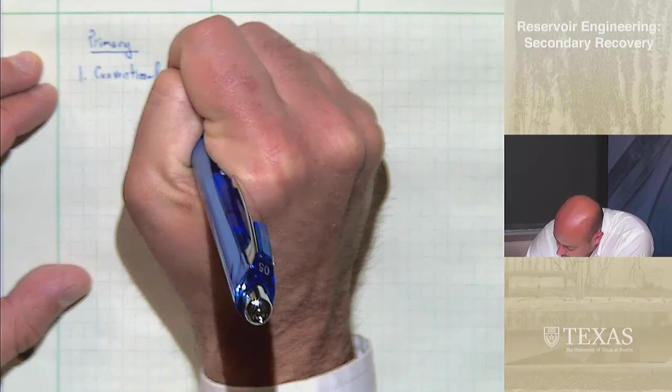If you have a conventional well, a conventional reservoir, that's a sandstone or carbonate, usually on the order of 1 to 1,000 millidarcies. The oil recovery is going to be 10 to 20% from primary recovery. You use techniques like artificial lift and whatnot to improve that.

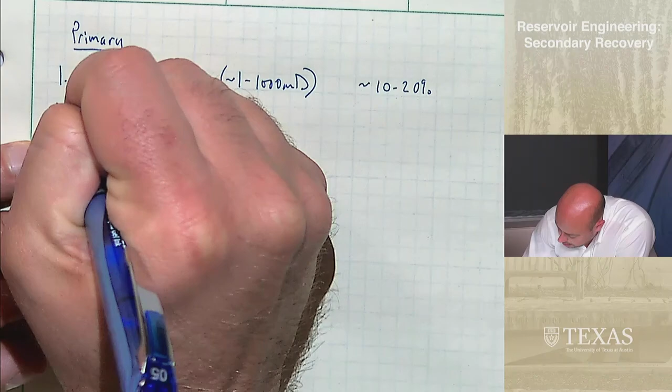In unconventional reservoirs and shales, we're often talking on the order of less than 1,000 nanodarcies. So maybe 1,000,000 times less than that. That is a really small permeability.

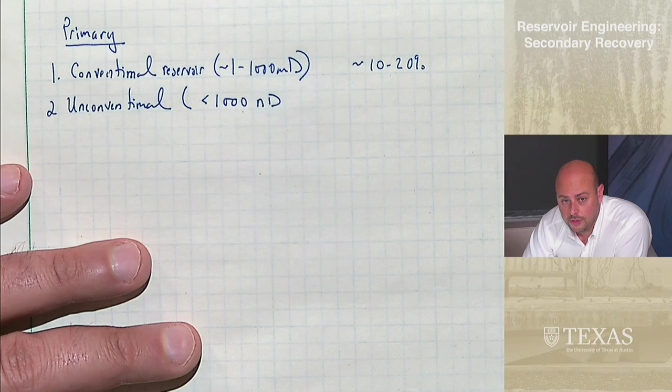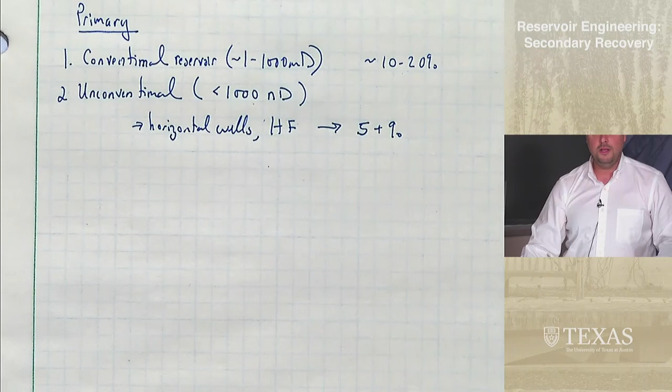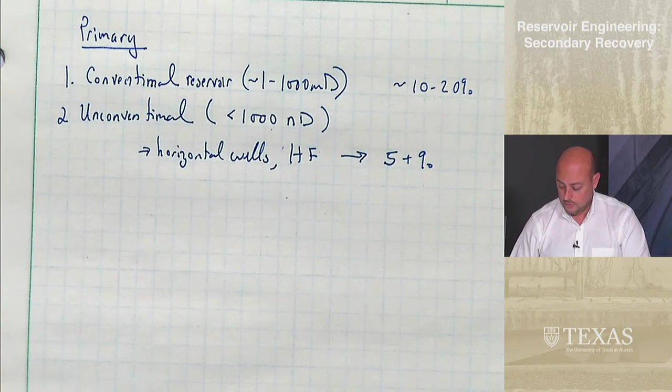For decades we knew about them, but we didn't even bother because it was impossible to create. And of course we've developed horizontal wells, hydraulic fracturing, and that has led to 5+% primary recovery. And yes, you're reading that right. This is that in a typical unconventional reservoir like the Bakken or the Permian Basin or something, we might produce on the order of 5% from primary recovery, and then we're often done. We don't even bother with secondary or tertiary recovery. So you can imagine that there's an enormous amount of potential there in unconventionals. And despite this low recovery, they're still very economical, and that's a big portion of our production.

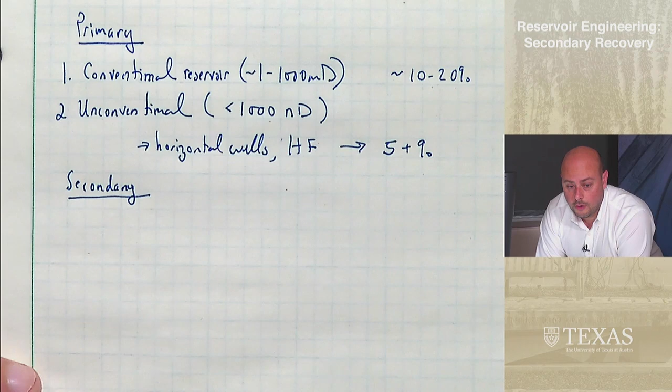Secondary recovery, and different people have defined this. The way that Dr. Lake defines it is the injection of any fluid after primary recovery that already exists in the reservoir. So the most common being water flood. You can inject natural gas too. That's another common one, but water flooding is the most common.

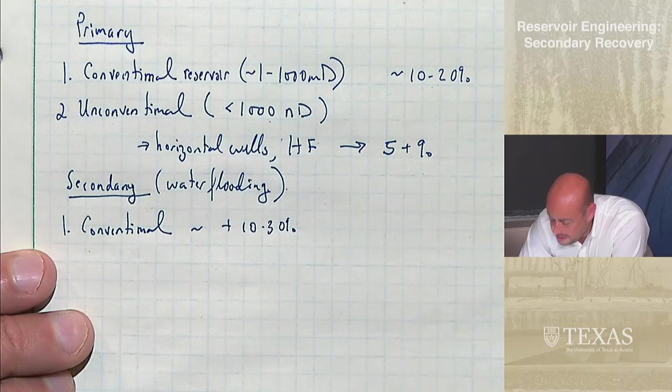In conventional reservoirs, we might get an additional 10 to 30%, and this might take decades. Primary recovery might occur over several months or just a couple of years. You might water flood for decades. We're still water flooding reservoirs that we found decades ago.

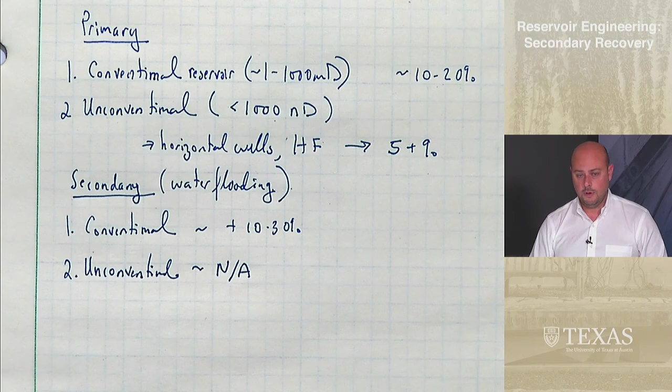Unconventional, I'm going to put NA. That's one of the reasons why we didn't talk very much about unconventionals in this class, because water flooding shale reservoirs is not all that practical. The pores are so small in shale reservoirs that it's difficult to inject that water. The amount of pressure you would need to flow through there is extremely high. So we don't usually water flood, but we're starting to do that a little bit, and this might be an area of the future. Remember, primary recovery in unconventionals wasn't even a thing 20 or so years ago. Water flooding may be standard, or other secondary techniques might be standard in a few decades, and you might be the person that helps to develop that technology.

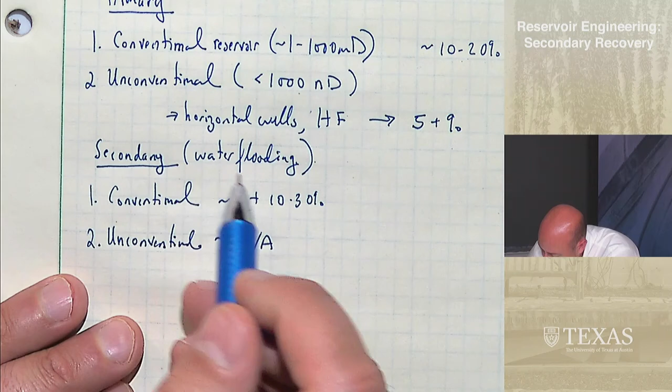And I say that it's NA, referring specifically to water flooding, because there are other techniques like injecting natural gas and other techniques that are usually tertiary or enhanced oil recovery techniques.

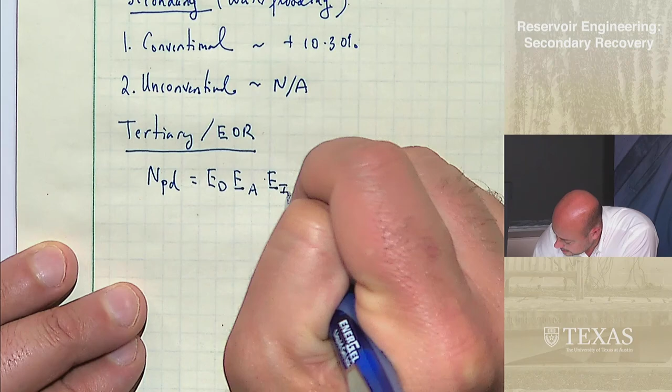Okay, let me talk a little bit about that. Remember that the dimensionless oil recovery is the displacement efficiency times the areal sweep efficiency times the vertical sweep efficiency times the initial oil saturation minus SOR. So those three different sweep efficiencies, I'll just call them E, are functions of time and the mobility ratio.

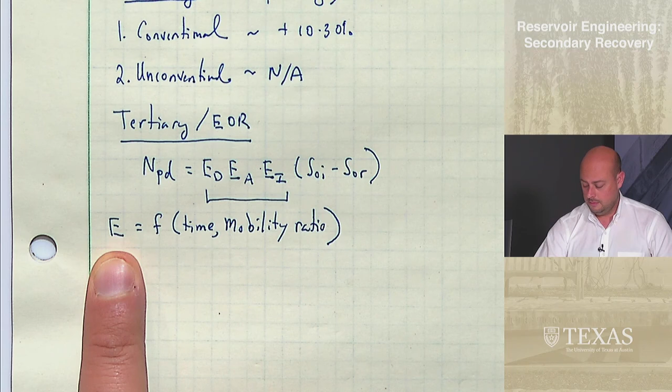Time, or dimensionless time, pore volumes injected. And remember what I've always said is that if we were willing to wait long enough, then E would go to 1, regardless of the mobility ratio. But we're not, because that might take hundreds of thousands or millions of years to do that. So it's very much a function of mobility ratio. I'll talk about that in just a moment.

Well, let me just define. Remember that M is the mobility ratio, and it is equal to KRW times mu O over KRO times mu W.

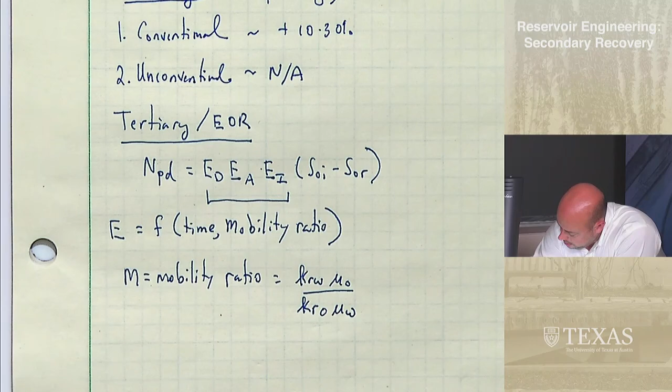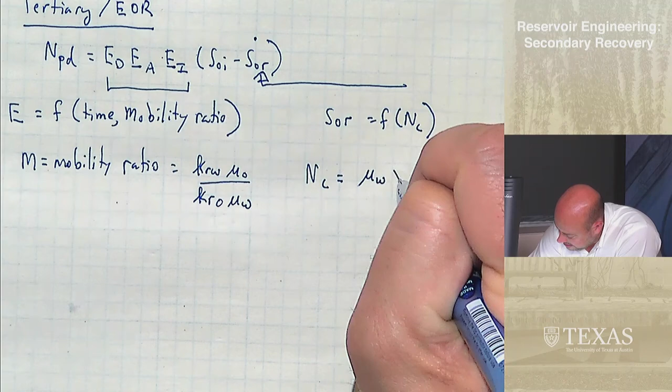The other thing we might want to try to improve is SOR, which is a function of the capillary number. What is the capillary number? A capillary number is a dimensionless number, which is the water or aqueous phase viscosity times the velocity divided by the surface tension, or the interfacial tension.

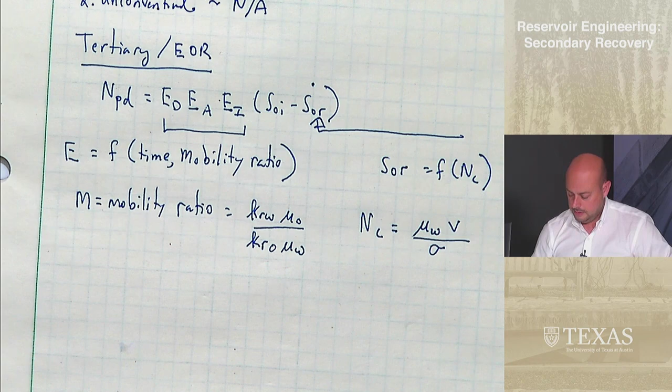So, in enhanced oil recovery, our goal is to improve the mobility ratio to make it smaller, right? So we want the mobility ratio to be smaller. That means either increasing the aqueous phase viscosity, decreasing the oleic phase viscosity, or decreasing the interfacial tension.

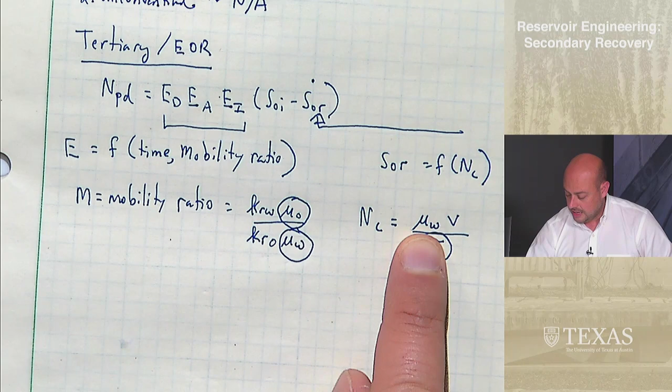Now, it's harder to change the relative permeabilities. You can see that we got the aqueous phase viscosity and velocity on the numerator. Those are both difficult to have a large effect on, and I'll explain why.

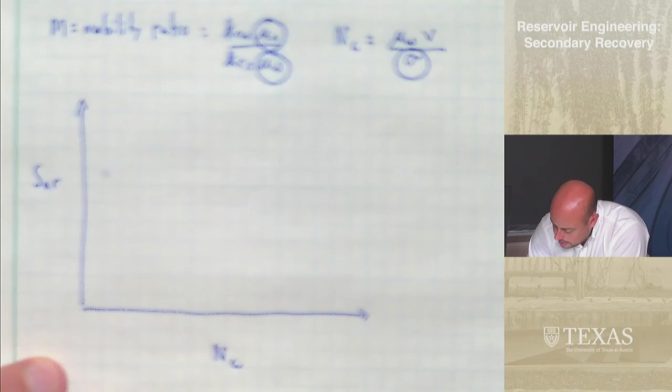So, if you were to plot SOR, the residual oil saturation, versus the capillary number—remember that's viscosity times velocity divided by interfacial tension—you get what's called a capillary desaturation curve. You can create this in the lab. It looks something like this.

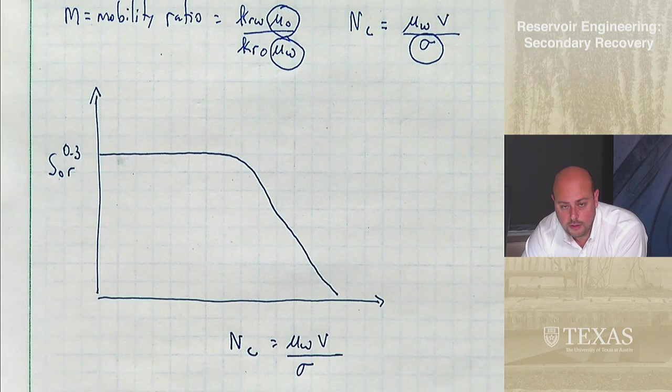This is a linear scale, so maybe this is like 0.3 or something. It all depends on the rock and the oil. This axis is linear, but this one is a logarithmic scale, so it might go 10 to the minus 9, 10 to the minus 8, 10 to the minus 7, 10 to the minus 6, 10 to the minus 5, 10 to the minus 4. A typical water flood might be somewhere over here.

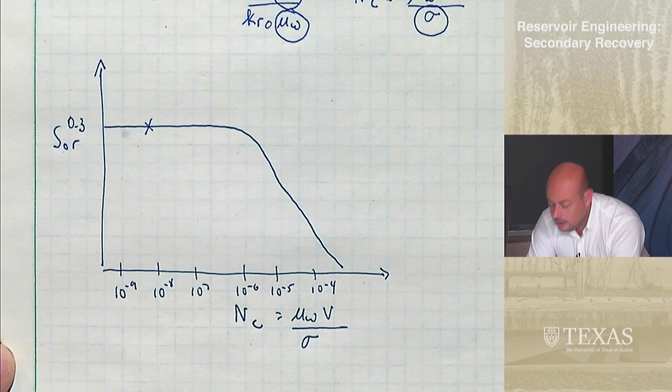So you can say, well, I can decrease SOR by increasing the capillary number, and I can increase the viscosity. I've been telling you all semester that we could do that using polymers or something. So we could increase the viscosity, or we could increase the velocity. That would increase the capillary number. Unfortunately, that doesn't work very well.

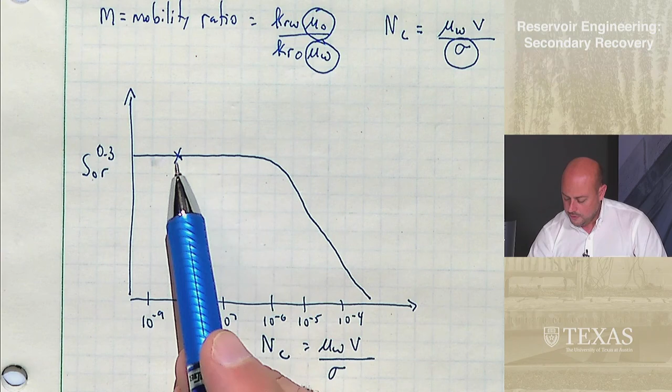The reason why is because we're here on this flat part of the curve, and this is a logarithmic scale. You would have to increase the viscosity or the velocity by several orders of magnitude to make a real difference, and that's just not practical. So what that means is we don't use polymers and other viscosifying agents to decrease SOR, but we can change the interfacial tension, and that's what surfactants are used for.

Okay, so in summary, EOR methods are lumped into decreasing the mobility ratio M. The way we do that is to increase the water viscosity. Those are polymer type methods, which are chemical EOR methods, or decrease the oil viscosity. Those are thermal or gas injection methods.

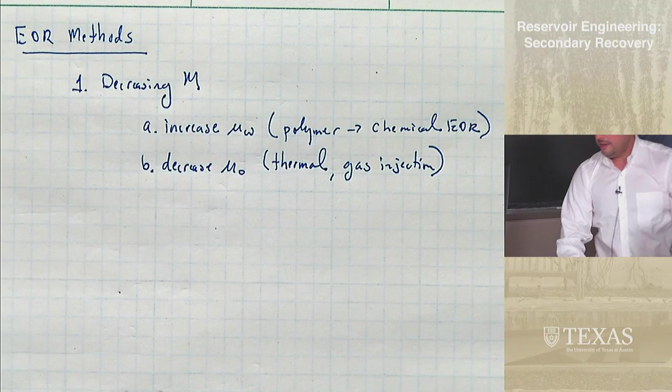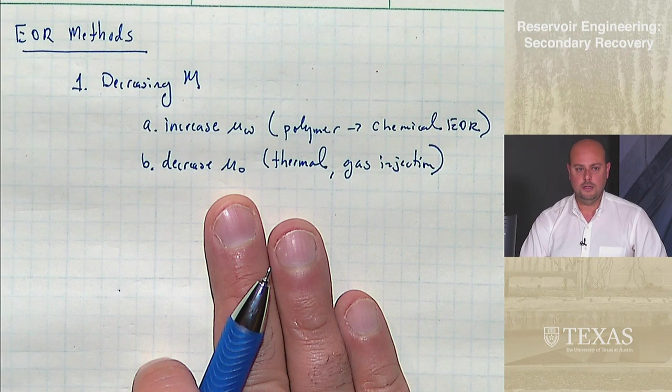So what do thermal methods do? It means heating it up, right? It works just like when you put your cooking oil on the stove in the morning. It's super thick and viscous. You put it on the stove, you heat it up, and then it flows really easily. It's exactly the same thing. We're going to heat this up, usually with steam. There are other ways to do it, like electromagnetic heaters and other things. But you heat up the oil, it decreases the oil viscosity, and then you have a lower mobility ratio.

Think about a reservoir, say in Canada, that's got really, really high viscosities. I'm not talking 10 times as much as water, I'm talking thousands or millions of times the viscosity of water. It's almost like a solid. Then heating has a big impact. With gas injection, you can inject things like carbon dioxide or methane, maybe nitrogen, in order to decrease the viscosity.

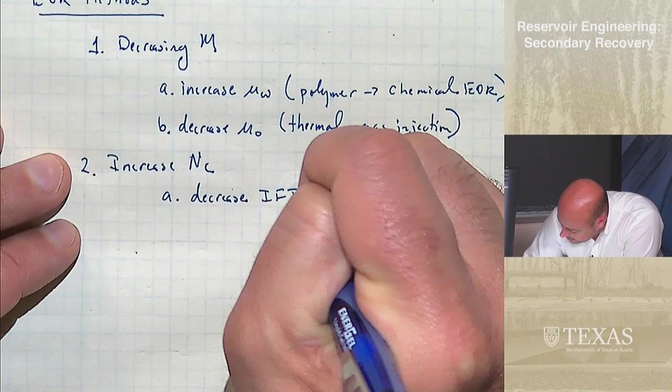And then the other method is, of course, to increase the capillary number, which is to decrease the interfacial tension sigma. You learned about that in petrophysics. Oil and water don't mix, they've got some sort of interfacial tension. What surfactants are is a different chemical EOR method.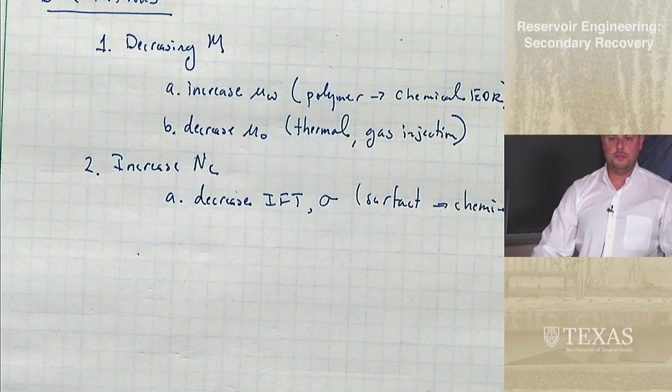They're basically soaps or detergents, and they work the same way. Just like you use detergent to clean your dishes or clothes, or soap to clean your hand, if you've got some sort of grease or oil or non-wetting fluid, and you try to use water to clean it up, it doesn't clean well. But if you add a soap or detergent, it reduces the interfacial tension and it comes off easily. It's the same idea in a reservoir. The oil and water don't mix, they're separated, and you get trapped oil. But if you reduce the interfacial tension with a surfactant, it flows much easier.

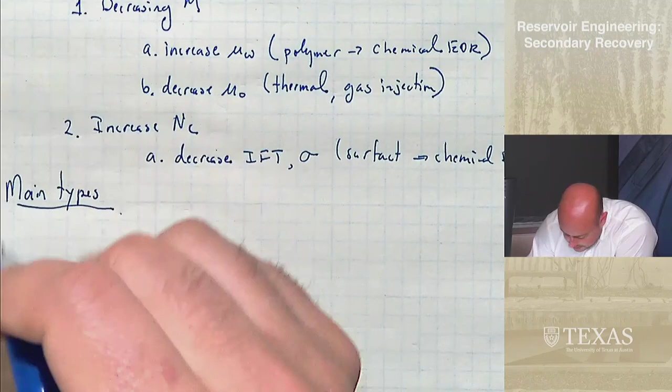So the main types of EOR methods are chemical. I like talking about this because this is my area of research. It's to use polymers and/or surfactants. Remember, they do two very different things: the polymers decrease the mobility ratio, the surfactants increase the capillary number, and that decreases the SOR. So they work in two different ways. Many times they're used in conjunction with each other. You'll inject a surfactant and then use a polymer drive for mobility control. We call that an SP flood, surfactant polymer flood.

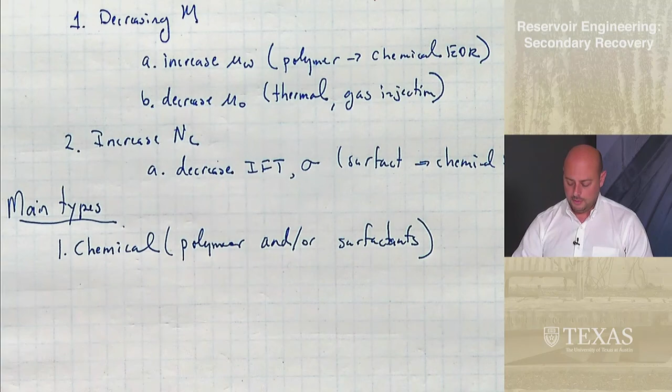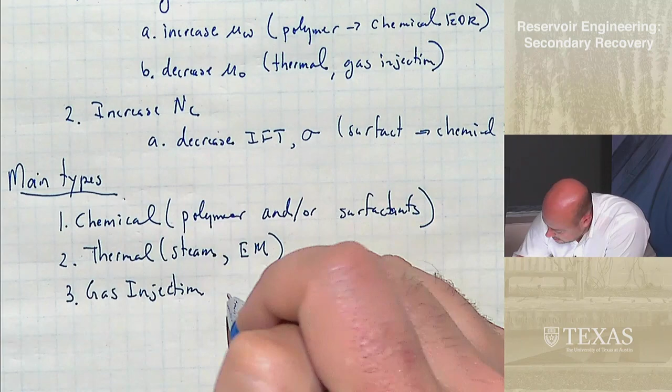The next method is thermal, as I mentioned, which is steam or electromagnetic heating. And the last one is gas injection, usually CO2, but it could be methane or nitrogen.

There are other, less used techniques. One of them is microbial EOR. What they do is inject microbes that feed off the nutrients in the reservoir, and at the oil-water interface they reduce the interfacial tension. So in a way, they work like surfactants.

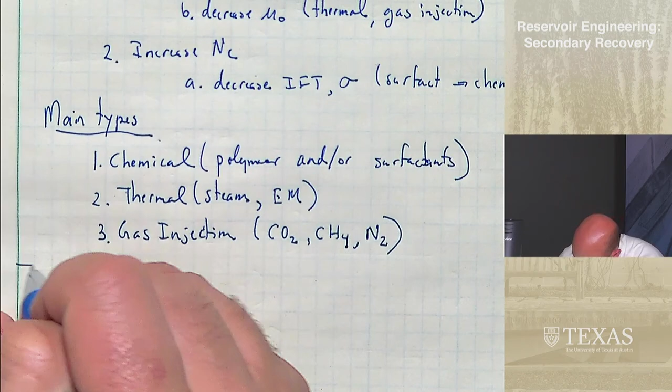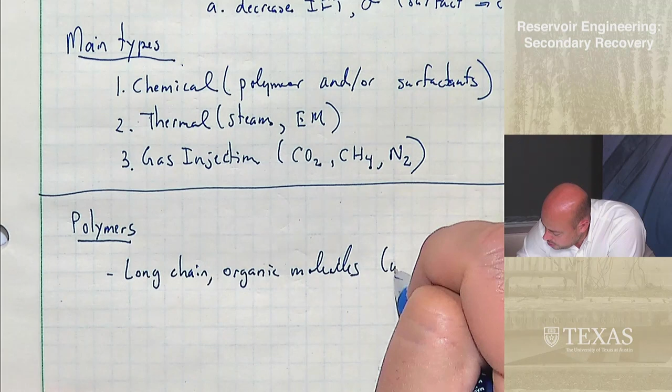Okay, so let me talk about polymers. I like talking about that because that's what I do a lot of my research in. What polymers are is they're long chain, usually organic molecules. They're usually, for our purposes anyway, dissolved in water. You all are familiar with polymers. You've heard of polyethylene, polypropylene. Most plastics are polymers, right? So you've heard of those. These are water dissolvable polymers that increase the viscosity.

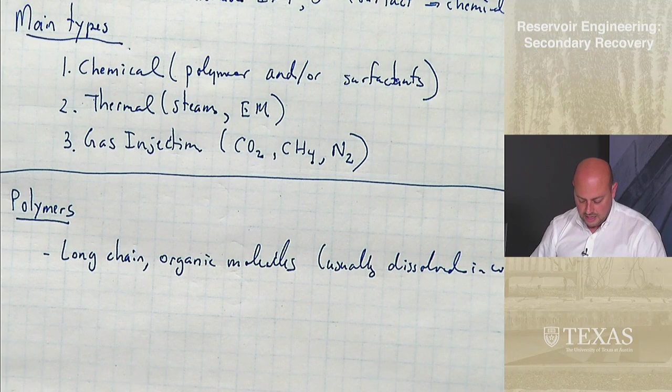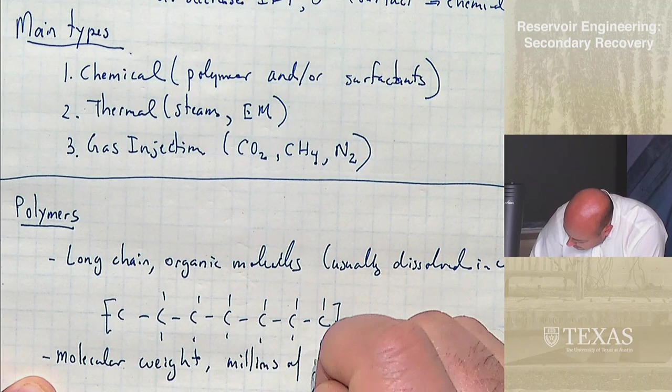And so remember I said that these are long chains, so what you might have is carbon molecules. These are connected to hydrogens, right? And I stopped at a point, but these are huge. These molecules are gigantic. They have a molecular weight of millions of grams per mole or pounds per pound mole, which means that there's thousands or more carbon atoms in there.

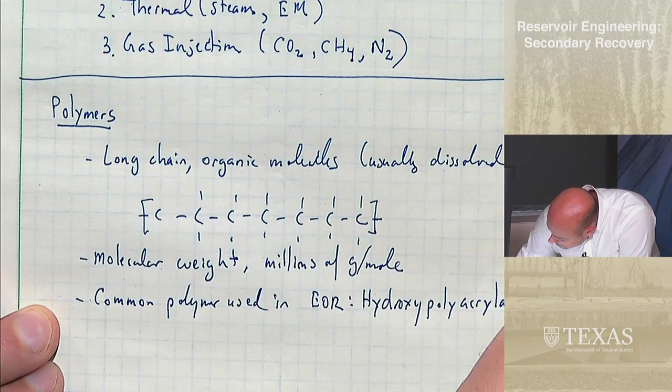One common polymer used in EOR is called hydrolyzed polyacrylamide. Okay, or we'll call it HPAM for short. Let me see if I can.

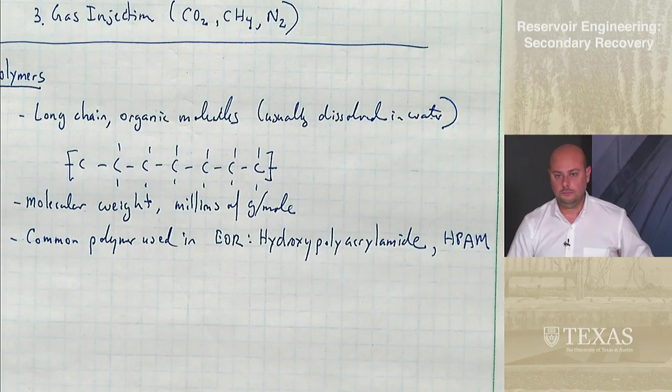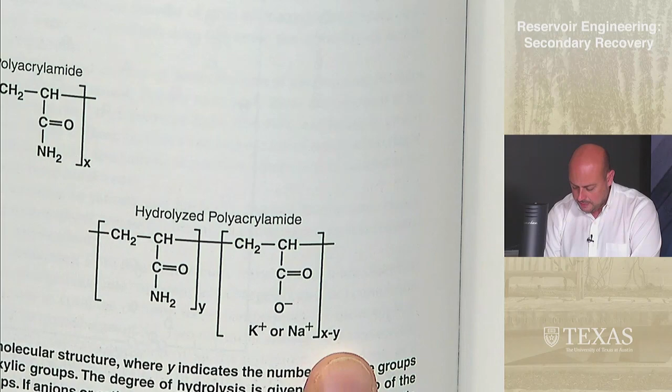So here's the structure of hydrolyzed polyacrylamide. So you could see what that looks like, and it's this molecule then connected to this molecule, and it's got, it was sort of like the polyethylene I showed, but then it's got this C double bond O and this NH2 group on there, and I've got this Y and X minus Y, so Y could be huge, right? It could be thousands, and X could be that. This is hydrolyzed polyacrylamide. That's what the chemical formula looks like.

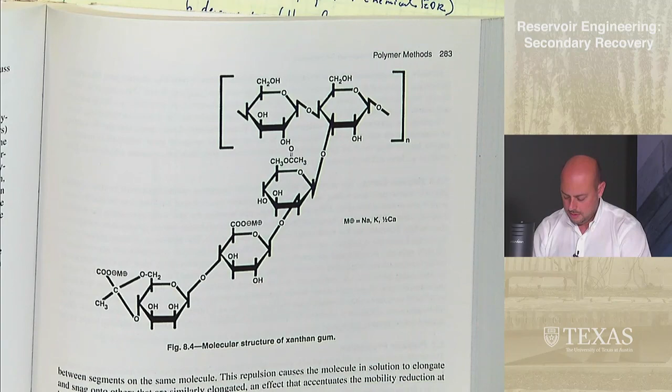Another less commonly used one, they used to use this one years ago, decades ago. They don't use it so much anymore. It's called xanthan gum. And I wanted to show that one because even though we don't use it as much in EOR, if you check the ingredients on most of your food, especially the processed food, there'll be xanthan gum in there. So you've got a chemical EOR agent in a lot of your food.

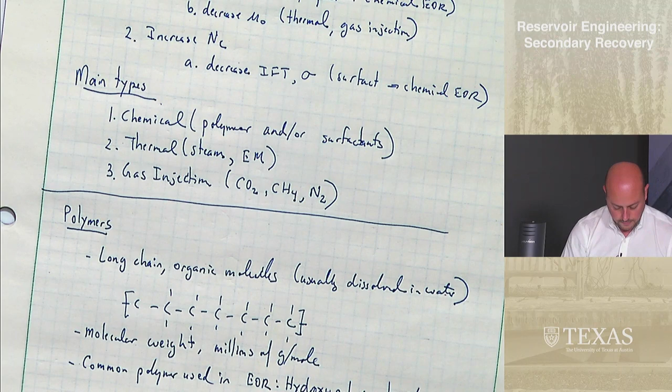These polymers have a high viscosity. Okay, and what I mean by that is it's going to be greater than 1 centipoise to maybe 1,000 or so centipoise. Okay. So water has a viscosity of 1 centipoise. At reservoir conditions where the temperature is high, maybe it's half of that, half a centipoise.

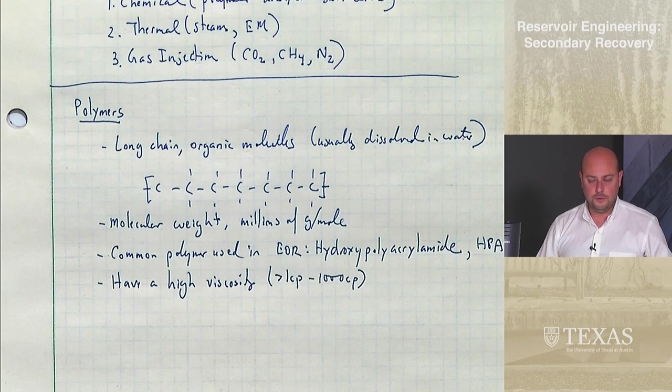Polymer, the only reason it's useful is because it's higher. It gives us a better mobility ratio. This viscosity of the polymer is a function of the molecular weight, the concentration, the salinity, that's the salt content, as well as things like temperature, etc. And the type.

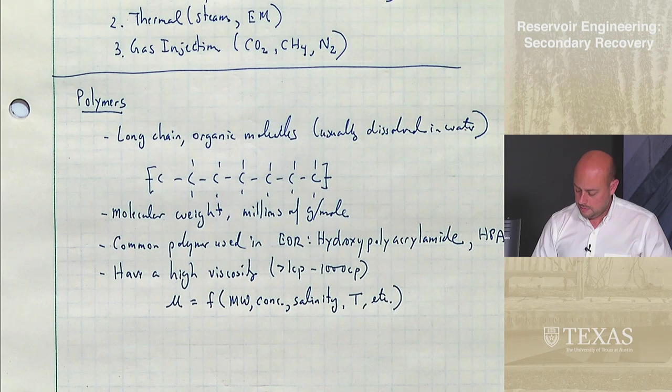So, by the way, I mentioned HPAM. There are some derivatives of HPAM that have been developed that are more suited for particular reservoirs. Okay, so you can increase the molecular weight. That's to make this molecule bigger. You can increase the concentration. We only add a very small weight percent in there, but if you add more, then it's going to make it even thicker. Probably not a surprise.

It's a function of salinity, and actually the lower the salt content, the higher the viscosity. It's a function of temperature. You can imagine it decreases with increasing temperature, just like most fluids.

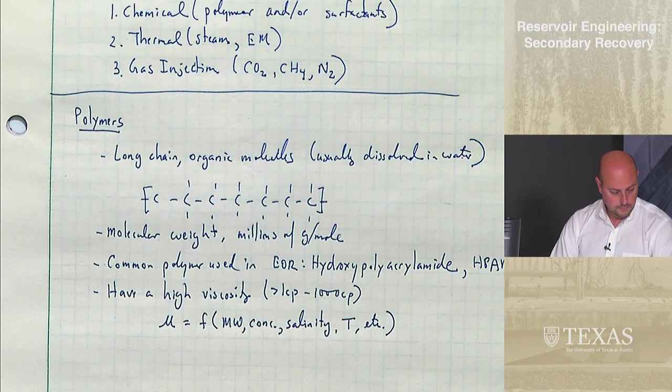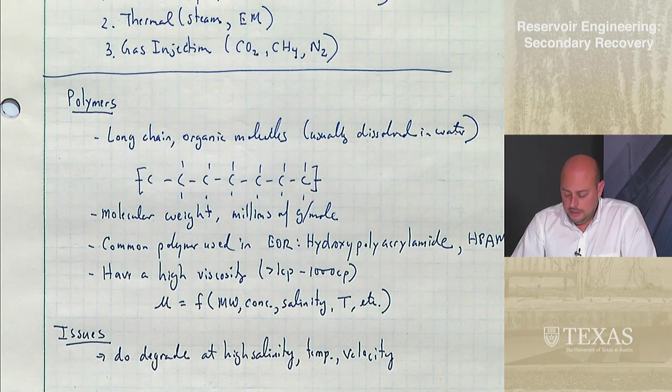Some of the issues are they do degrade at high salinity, temperature, or maybe velocity. Okay, by degrade I mean it breaks up the molecule and then it decreases the viscosity. Okay, so it sort of defeats its point, right? So it's very hard to get a good viscosity of these things, and the way you compensate for that is that you increase the concentration. If you increase the concentration, then that costs more money, and so the issue is cost, right?

Water's cheap. Okay, when you start adding any of these enhanced oil recovery methods are expensive, so that's why we often don't do them. It's just not economically beneficial. So we're always looking for ways to improve the cost.

The other is the injectivity. Okay. So the whole point is that these polymers have a high viscosity, which improves the mobility ratio. But it's harder to inject a high viscosity fluid than a low viscosity fluid. That just makes common sense, right? It's harder to inject. For the same pressure drop, you're going to get less flow rate, or for the same flow rate, you'll get a lot bigger pressure drop.

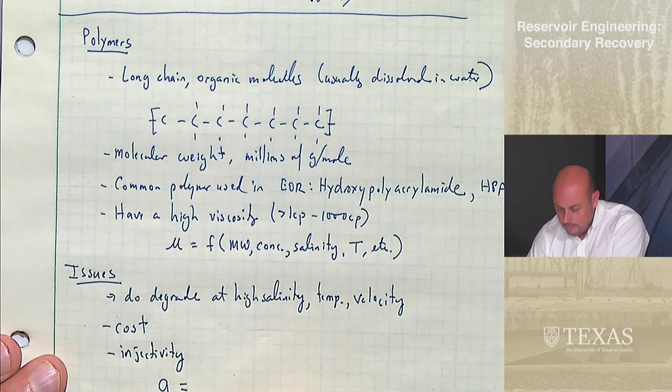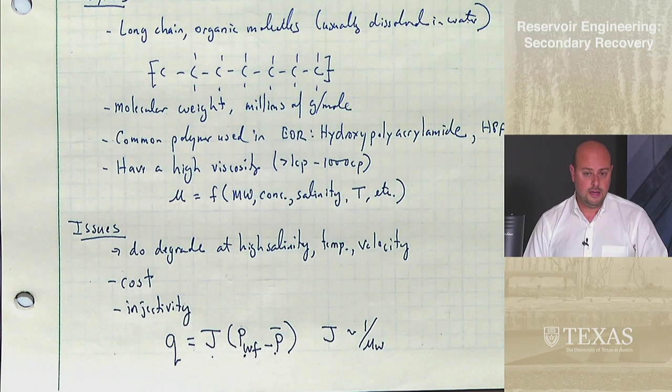And in fact, you remember from Reservoir 1 that we learned that the production or injection rate in this case is equal to the productivity index times the bottom hole pressure minus the reservoir pressure. So for given average pressure and bottom hole pressure, it's a function of J, and J is inversely proportional to the aqueous phase viscosity. So if you increase the viscosity by a factor of 10 or 100, then that means that your injection rate is going to decrease by 10 or 100 for the same bottom hole pressure.

Or alternatively, if you wanted to keep the rate up, then the bottom hole pressure would have to be higher. And if you injected too high of a bottom hole pressure, then you might fracture the rock, and you don't want that. Okay, so that's a problem. The nice property of polymers is that it partially, not entirely, but it partially offsets that.

So if you were to plot the viscosity versus the shear rate, shear rate is proportional to velocity divided by the square root of permeability. It's more complicated than that, but that's good enough for us. You might remember from your transport phenomena class that for a Newtonian fluid like water, the viscosity is constant.

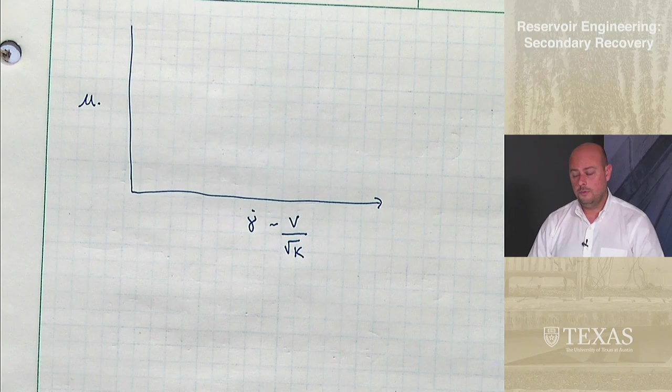But certain non-Newtonian fluids, like polymers, are shear thinning, meaning they decrease in viscosity with shear rate. Now, most polymers aren't completely shear thinning. At very low shear rates, they might be constant, then they shear thin, then constant again at higher rates. On a log scale, log of viscosity versus log of shear rate, this might be 100 centipoise, this might be 1 centipoise. So depending on your velocity, it can change by a couple orders of magnitude.

Why is that a good thing? Well, near your injection well, your velocities are very high. Remember that analogy I've given throughout the semester: if you look at a bathtub or sink right by the drain, the fluid is flowing really fast, and if you go far away, it's flowing really slowly. Same idea for wells: velocities are very high near the well, so the viscosity is relatively low there. Far away from the well, where velocities are lower, you have a high viscosity, and that's good for mobility control. So the shear thinning behavior of these non-Newtonian polymers is beneficial to enhanced oil recovery.

Now, it just partially offsets that. I put 1 centipoise here, it's usually hard to get that low, that would be like water. So we're always looking for polymers that have ideal rheological properties.

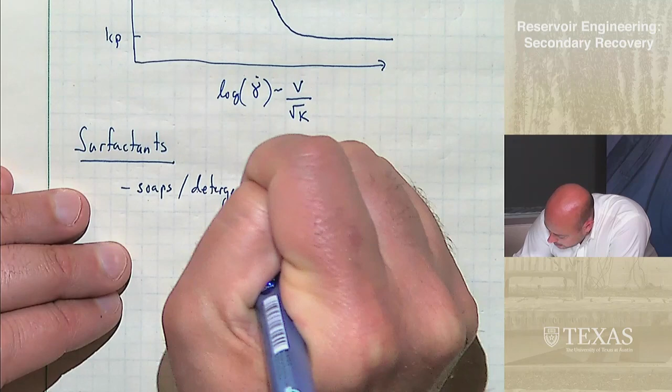So let me briefly talk about surfactants. As I mentioned, these are soaps or detergents. Now, we don't just use any surfactant. We can't just take the soap we have in the kitchen and inject it into the reservoir. We develop very special surfactants for a specific oil and a specific reservoir, and that takes a lot of work.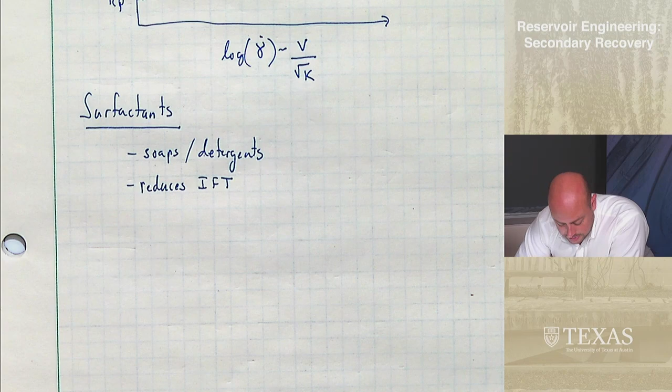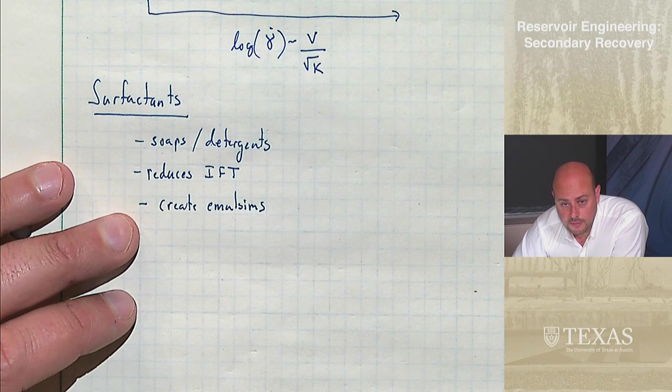As I mentioned, it reduces the IFT. You could reduce it all the way to 0, then it's just going to be miscible with water and flow through it, and that would be perfect. Oftentimes with surfactants, we can get to really, really low interfacial tensions, and the oil starts becoming miscible in the water. It's not completely miscible, but you start to create what we call emulsions - oil in water, or water in oil, or sometimes something between, what we call a microemulsion.

These can be expensive. It's not cheap - soap in the kitchen's cheap, but when you're injecting this much, it can be expensive. One of the things we try to minimize is the amount of what's called surfactant retention - the amount of surfactant that gets left behind in the reservoir. We want to minimize that so we can reuse it.

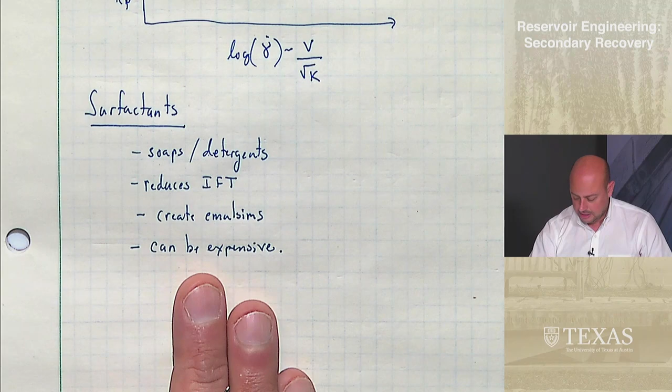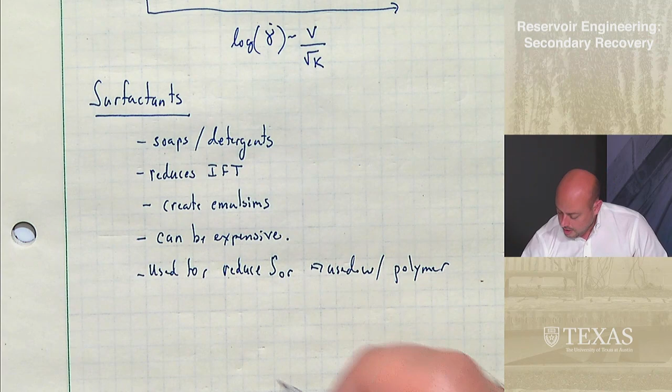So surfactants can be expensive. Remember, they are used to reduce SOR, and for that reason they're often used with polymer. So surfactant reduces the SOR, polymer improves the mobility ratio, and we can have what's called an SP flood - you inject surfactant followed by polymer.

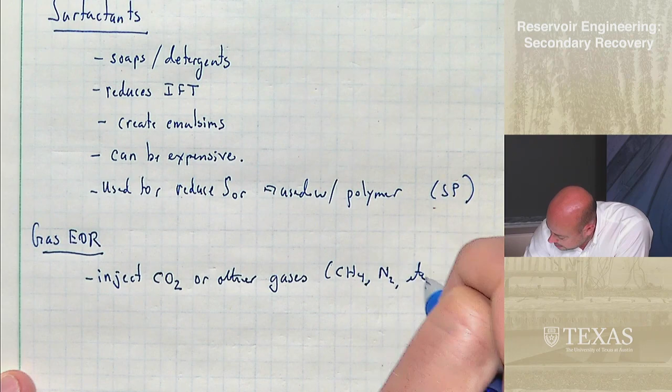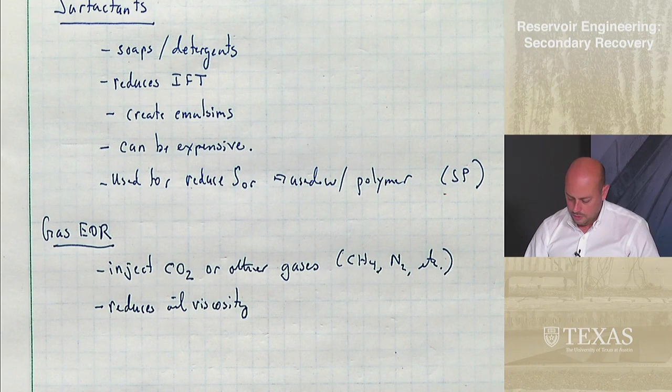So in gas EOR, we inject CO2, the most common, or other gases - CH4, nitrogen, etc. It has a couple of mechanisms. One is to reduce the oil viscosity. That's probably not a surprise. If you have this gas and mix it somehow - and you do have these miscible versus immiscible displacements - but if there is some mixing with low viscosity carbon dioxide gas, it's going to reduce the oil's viscosity. It also can swell the oil, which makes it a little easier to flow and produce, and it might increase the pressure.

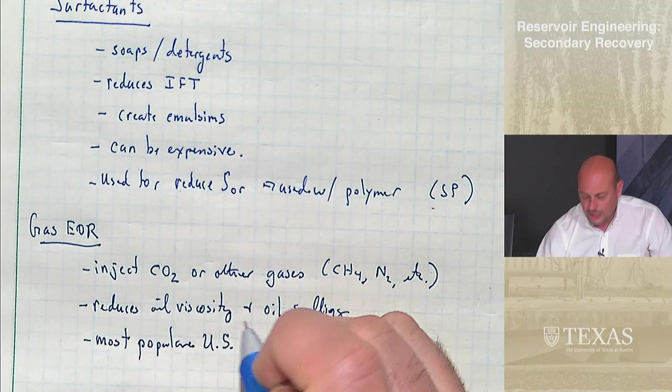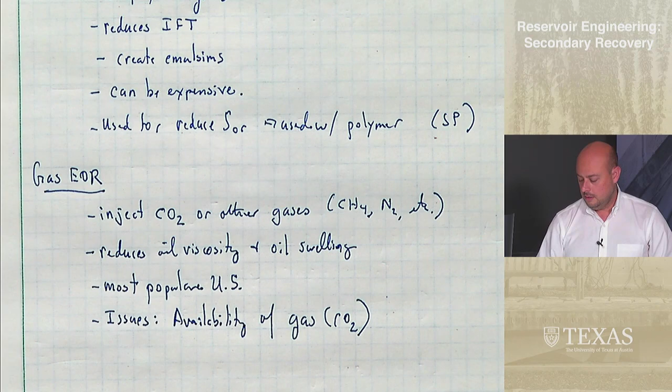This is perhaps the most popular in the US. It's been used for very many decades. One of the issues is availability of the gas, especially if it's CO2 - you might not have CO2 available to you, and that's one issue. That's one of the reasons why sometimes methane is used. So maybe you produce oil, you get some solution gas that's created, you do some separations, and then you inject your produced gas. That's sometimes not as good as CO2, but it might be what you have available.

I'd like to say a couple things about gas EOR. The first is that it's a technique gaining a lot of attention for unconventional shale reservoirs. As I mentioned, it's really hard to inject water - high viscosity, bigger molecules - into these nanopore size shale reservoirs. CO2 is a little bit more feasible because it's lower viscosity and a smaller molecule.

This technique has really received a lot of attention recently. Now, it works a little bit differently than what we do in a typical water flood. It's very, very difficult in a shale reservoir to inject from an injector well and produce from a producer well that might be hundreds or thousands of feet away. Remember that these shales have really small permeability, and it's very difficult to flow. If you looked at shale, you would never guess it had any porosity or permeability - they look like solids. So it's very difficult to inject from an injector and produce from a producer far away.

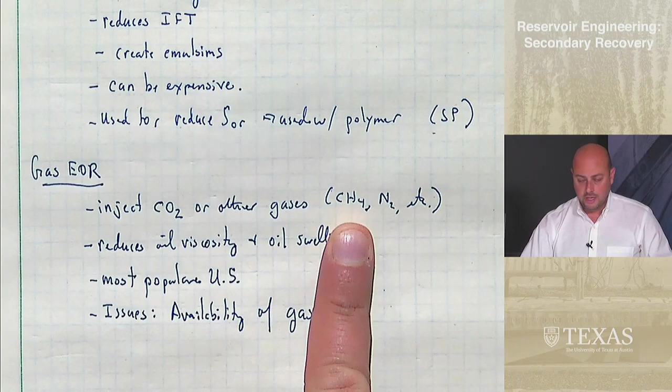In the paper we wrote, we found that if you re-inject produced gas, that can be almost as effective as using carbon dioxide.

There's another thing I want to say about CO2 for gas EOR: we've been doing this for decades, injecting CO2 underground for enhanced oil recovery. As most of you know, carbon management has become a big issue, and I imagine will be a big part of many of your careers - finding something to do with CO2 as opposed to putting it into the atmosphere. One solution is carbon capture, utilization, and storage - CCUS - which refers to capturing CO2 from things like power plants, re-injecting it underground, either for storage, that's the S, where you just trap it there for no other reason, or utilization, which means using the CO2 for something.

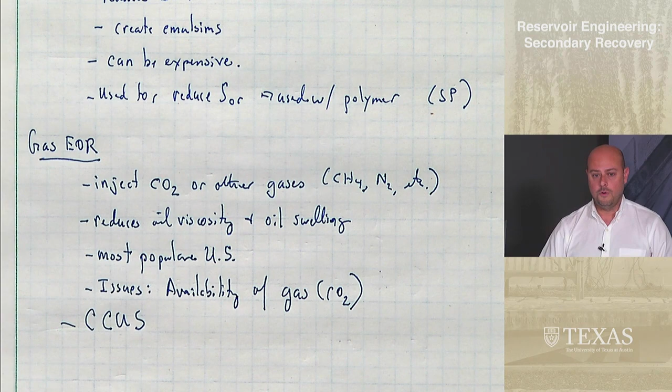Our expertise in gas EOR has made this possible, and I believe that if there's a solution to CO2, CCUS is a big part of that solution, and our knowledge gained from this is contributing to it. Whether we just store it in, say, an aquifer and leave it there, or my favorite, utilization - utilization is basically gas EOR, and I'm really excited about that. I do a lot of research in CCUS, and I'm excited about the utilization aspect because I consider it the world's greatest recycling system.

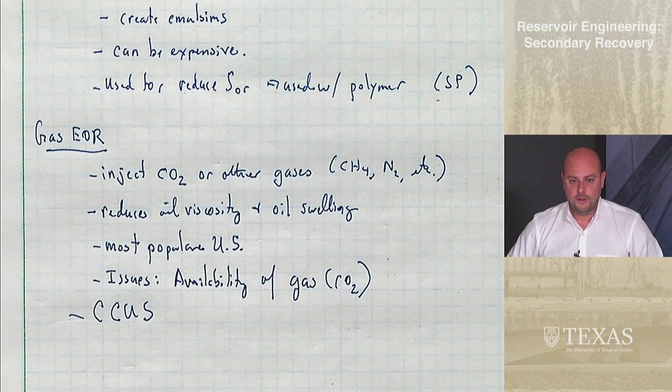We produce oil, we burn it, we create CO2. Instead of putting it in the atmosphere, we re-inject it back underground. We create more oil, which creates more CO2, and we put it back underground. Okay, it's a little bit more complicated than that, but that's the general idea. So I consider that the world's greatest recycling system, and I think that could be a future of what we do as petroleum engineers.

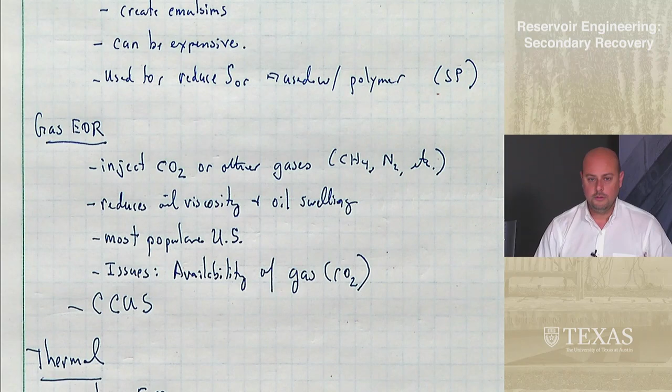I'm running out of time, so I'll just briefly mention thermal methods. You can do steam or electromagnetic heating, or put actual heaters down in the reservoir. The idea is that you heat up the oil and the viscosity decreases, can be by orders of magnitude. If you're talking about oils in Canada, they might be millions of centipoise, and you can decrease this by orders of magnitude - that's a really effective method.

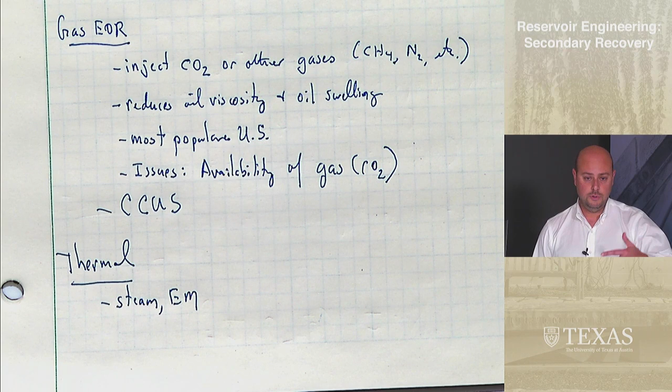So anyway, you could heat it with steam or electromagnetic heating. They have a process called SAGD, steam assisted gravity drainage. The way that works is you have two parallel horizontal wells, you inject steam, and the steam results in a lower viscosity oil, which then can drain down to the other producer well. So that mostly completes my very brief overview of enhanced oil recovery.